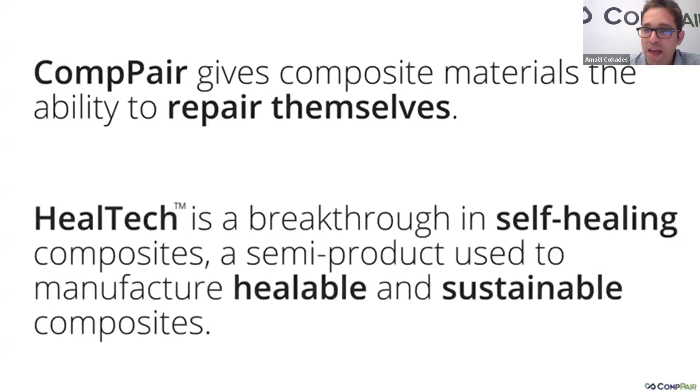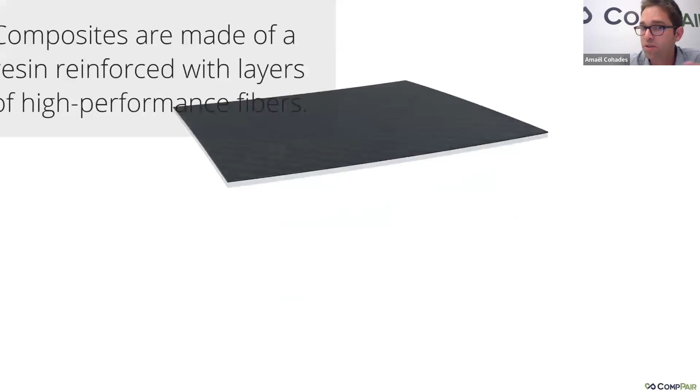So why CompPair? For a composite repair. Behind that, I will mention HealTech. HealTech is the product line that we have. So we are bringing standard prepregs, made of carbon fibers here, or glass fibers, or natural fibers, pre-impregnated with the resin, and that's really the core of what we do into the resin.

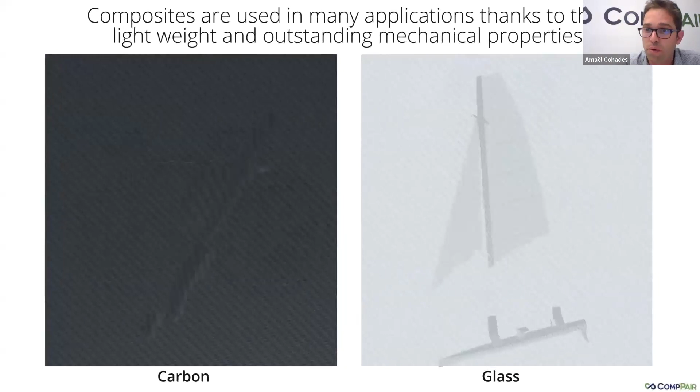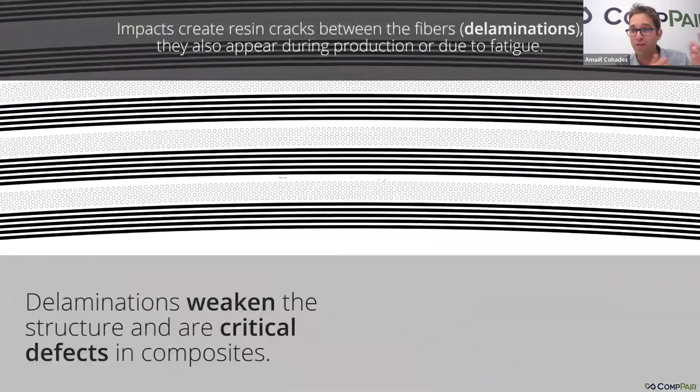And then we take the layers, typically for producing composites, superimposed on top of each other, cured, and giving such applications for wind, aerospace, automotive industries, or sports application, for example, that we will just see here with an example, the hockey stick. For example, we have an impact while playing hockey or fatigue cracks, where you see that there is fatigue and there are cracks that are growing within the matrix, typical delaminations that you have here.

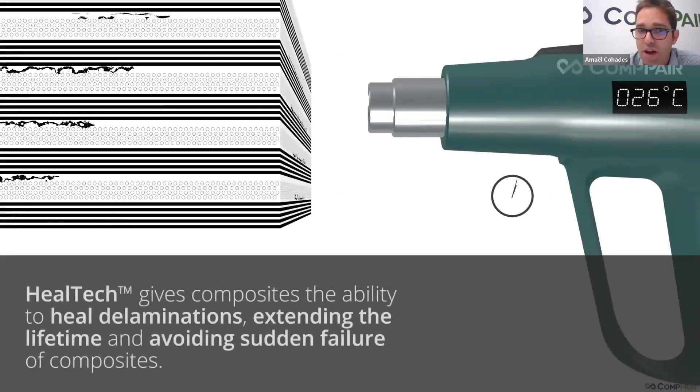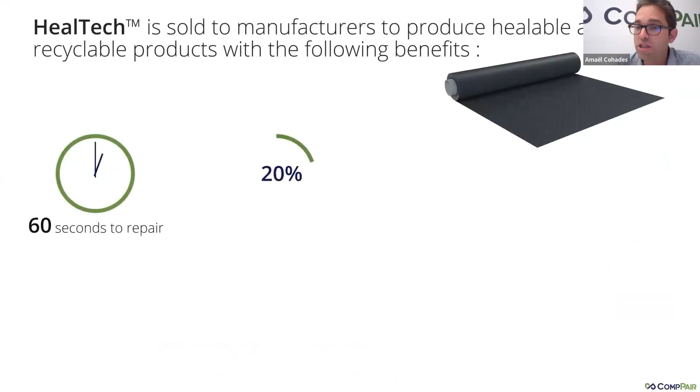And if not taken seriously, then they will just continue to grow. So we need to repair, but currently we cannot repair such kind of things. With CompPair, we just come with heat, the heat gun, 100 degrees, we activate the mechanism of repair, and then we regenerate the damage fully. This can be multiple times, so this is extremely fast.

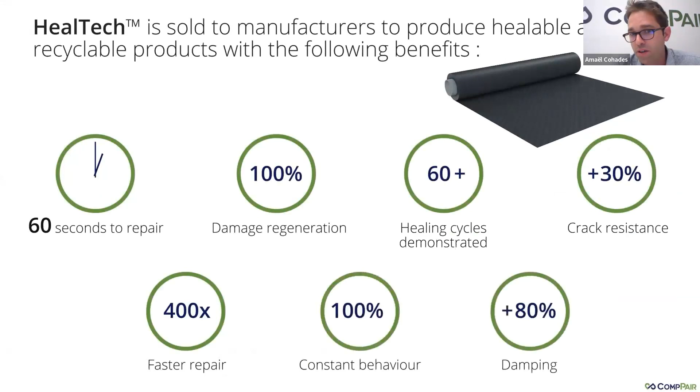Globally, in terms of mechanical properties, I will come back to the two other ones after. The most important is to show what you see here, and maybe you have seen us at trade fairs, for example at JEC recently. We have a nice demo to show you visually how we repair damage, and all that is translated into mechanical recovery as well of the damage.

And linked to that, what is really interesting is that this regeneration has a lot of different implications and a lot of different potential really benefits for various types of applications and various types of properties.

And because this is regeneration under damage, here we have seen in terms of sports, in terms of impact, but what we have seen is that regeneration can have a lot of other benefits that I like to see at two levels, let's say, because as materials provider, we are quite high into the value chain, and our customers are typically part manufacturers, and the customers of our customers are the ones as well that will benefit from the repair. So we need to look at the benefits of this regeneration at those two levels.

The benefit of the regeneration for production can be reduction of production defects, so reducing production cost as well to some extent.

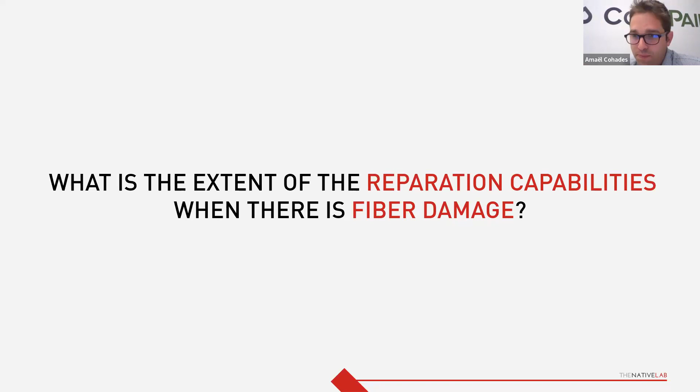Very interesting. Perfect, so the next one I would say: what are the particular approaches for recycling your healable parts? And something maybe very technical, let's see how much we can go into detail: is the cured material also thermoformable?

In terms of recycling, and coming back to the last question as well, to the extent of damage and linked to the vision of the company, we want to bring full circularity to the composites industry. What we have shown is that these composites have the capacity to be recycled in an ecologically efficient way. This is important because not all composites have this capacity, and it's a crucial point why it's taking so much time to bring recycling to the industry.

Now we are getting there. That's right, that's for sure. But one thing that is highly challenging is how to be, at the end, economically on top of being ecologically efficient for the recycling.

And there we have found a way, a proprietary one, to be able to recycle those materials efficiently. This is because of the intrinsic nature of the materials, and it's specifically applying to the healable composites. Our process will not work on other composites, it's really made for our composites. But we have this capacity, though it's less developed commercially than our prepregs, because our prepregs are here in large quantities.

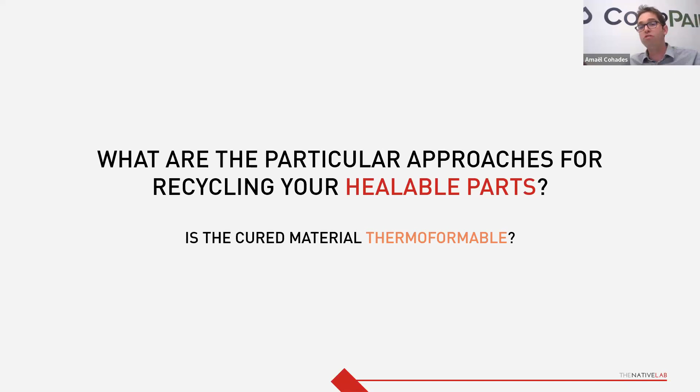So if you are producing parts that have a lot of scraps during production, and some specific parts have that, then this starts to be interesting for us. Or for really large parts where we can recycle the fibers and then use those large parts of recycled reinforcement that are cut for making other parts. This is the one thing we have demonstrated - the capacity to bring back relatively long fibers, the same size as the part, clean, and therefore this is of interest for many types of applications.

I think that the word clean here is also important because many other recycling processes damage the fibers, and especially attack the surface of the fibers and remove the sizing that protects the surface of the fibers. I think that you can provide essentially raw material in its raw, let's say, performance level.

It's quite interesting. Just one last comment here - as I said, it's less developed, that's the end of life. So when you want to have a big impact, you need to start somewhere. We started by production of the prepreg, implementation of the prepreg, extension of the lifetime. Recycling is at the end of life, so it's going to come after. For that, we are continuously working on that, and we are looking for partners to join forces in order to do that. So if there are people in the webinar, don't hesitate to contact me on this specific topic.

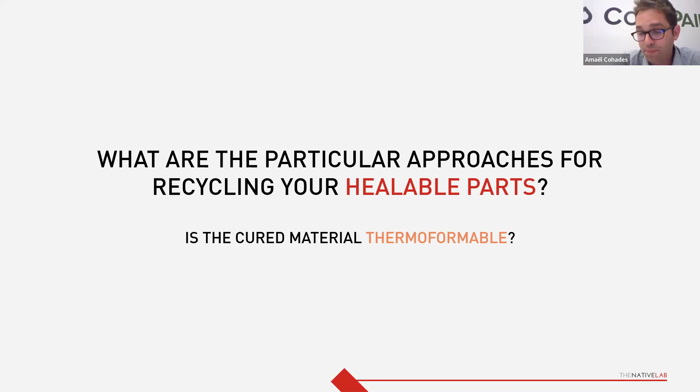I think we can come to the last question, if I'm not mistaken. No, there's still another one after this one.

Any expectations of distributing a resin in liquid format? So for RTM, for vacuum assisted resin infusion molding, wet layup, others?

Thanks for the question. This is something that we have announced at JEC this year, that we have done the section of a wind turbine blade by Varim, and this was work we have done over the last 2 years, conducted by my associate Robin, the CTO of the company. So we reached a stage where we can provide this technology under infusion, which is really interesting. It's still continuing. We are also looking for applications specifically in there, and that would be the first pioneers into there. So this is one thing.

Then we are continuously improving. The role of CompPair is to bring broadly the capacity of healing to composites. And so this is not only through prepregs. Prepreg is our main activity commercially, with different types of applications. And we continuously improve the formulations, bringing new formulations for different specificities for the market. But then it's also getting into other types of manufacturing processes.

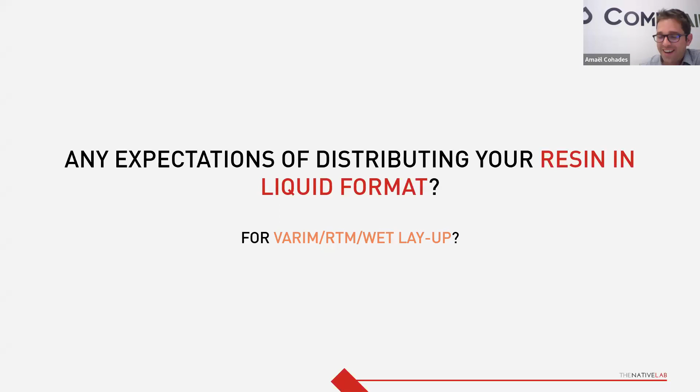Joker. No, yeah, everything can be imagined. Everything can be imagined.

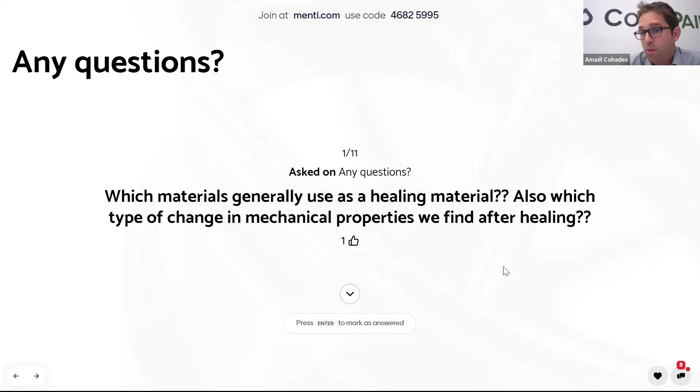Perfect, I hit this one as answered as well. For CompPair, how does it work for internships or jobs? If we are in LATAM, is it a good idea to apply? Thanks, this point is for you, Amaël.

Always interested to have internships and jobs. I invite you to go on our website, there are different job openings as well. When we receive a CV, we consider all of them, we go through all. Please allow some time, because sometimes applications come all at the same time and suddenly you have a lot at once. It takes a bit of time to treat them, but we're doing our best. Perfect, thanks - it's one of our students for sure.

Any suggestions for reading material to better understand self-healing composites, the vascular structure and distribution of the healing resin, and the layer structure of the composite? There are thousands of reviews, thousands of open access reviews as well. I'd say start at the research level, with labs that are well known, with professors specialized in self-healing composites who have published reviews. Then you'll get to know everything from there.

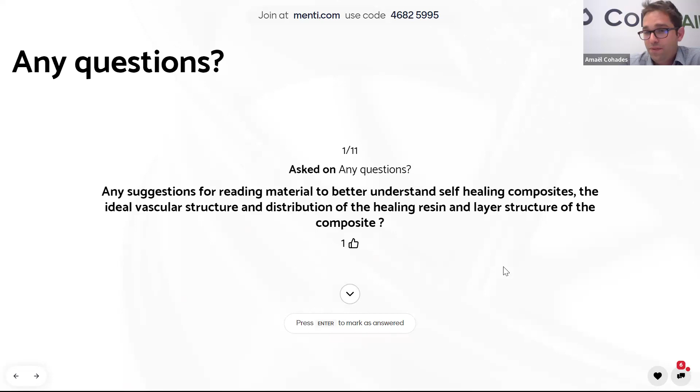Perfect. Six questions left. Firstly, thanks a lot for this very beneficial webinar. Does CompPair healable prepregs work regardless of manufacturing method, like autoclave, RTM, etc.? And do these require some curing cycle? I think we partly answered this, but maybe you want to stress that answer again.

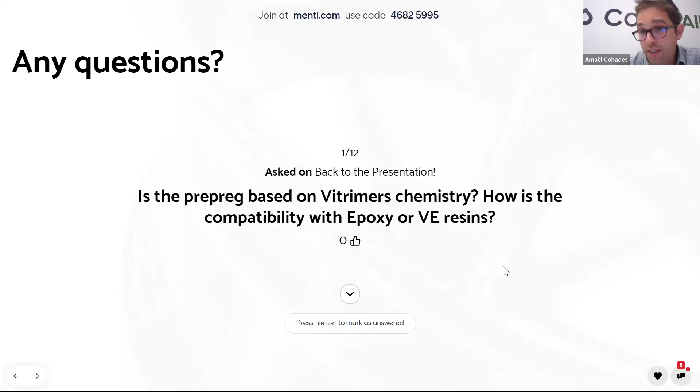Is the prepreg based on Vitrimer chemistry? How is the compatibility with epoxy or vinyl ester resins? So no, it's not a Vitrimer, and the main characteristic, as I said before, is that when we repair, we keep the structural properties of the part. In terms of compatibility with other resins, you mean having a co-cured part or bonding to some extent with another part? Yes, this is compatible, and we have done some specific applications with that.

Four questions left, if there are no new ones coming up. Do you use epoxy or UP resins, and what are the criteria for the thermoplastic phase? Similar to the previous one, I think I answered that one.

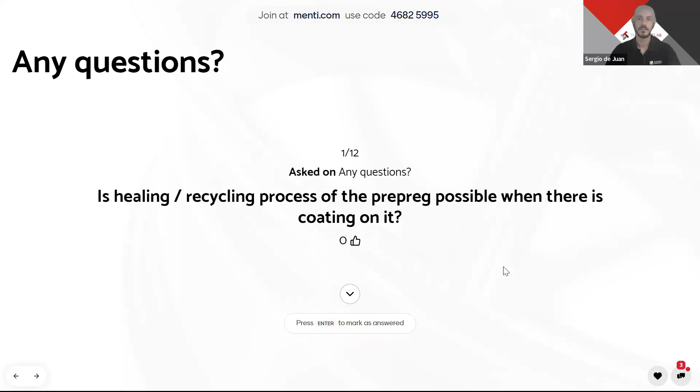Is healing or recycling of the prepreg possible when there is coating on it? Oh, very good question. So yes, we have some compatible systems. We can apply specific paints on it, specific gel coats, and I'm happy to provide the answers to that. We have some specific systems that are compatible in terms of coatings on the final composite.

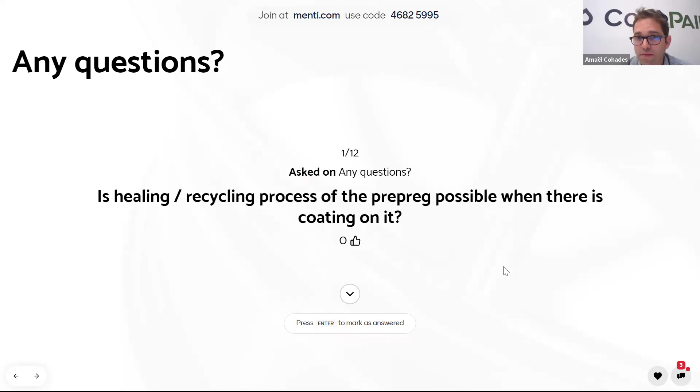Two more. Could you please explain the healing mechanism and the equipment required to do self-healing? So it's a heat trigger. As long as you go to 100 degrees, it heals. It's just a standard heat gun that we use. We have many videos on the website, I invite you to check those, or come visit in Lausanne, or at a trade fair, and I'm happy to make a live demo.

Behind that, it really comes down to the healing requirements and mechanism during a practical case. It's bringing heat, no pressure needed, so you leave it on site. This is really the most important part, not having the need to remove the part from a bigger application, like an airplane. If a part is damaged, you don't need to dismantle it and put it back into the press or the mold. You can just do it on site, and that's really the main purpose of CompPair products.

I think there's one more. Yes, there is. Is it open to international job applications, like from Turkey? I think you answered that, yes, you just need to go to the website. Yes, we are open to international job applications, so feel free to apply.